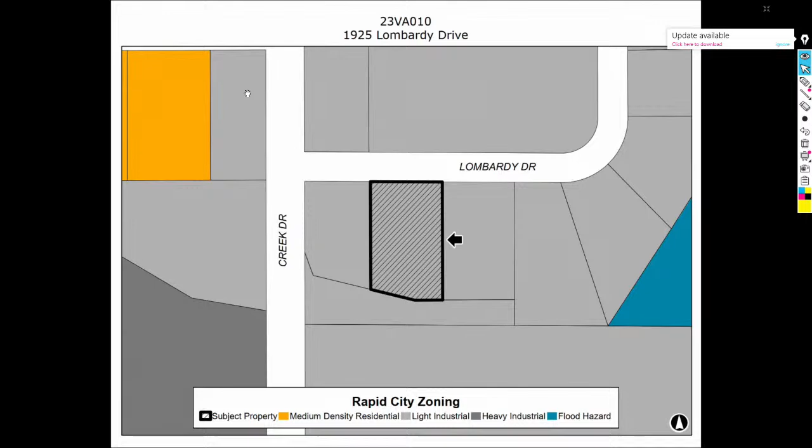Good morning. Item number 2 is 23VA010, which is a variance to reduce the side yard setback to 10 feet in lieu of 25 feet. Property generally described as being located at 1925 Lombardy Drive.

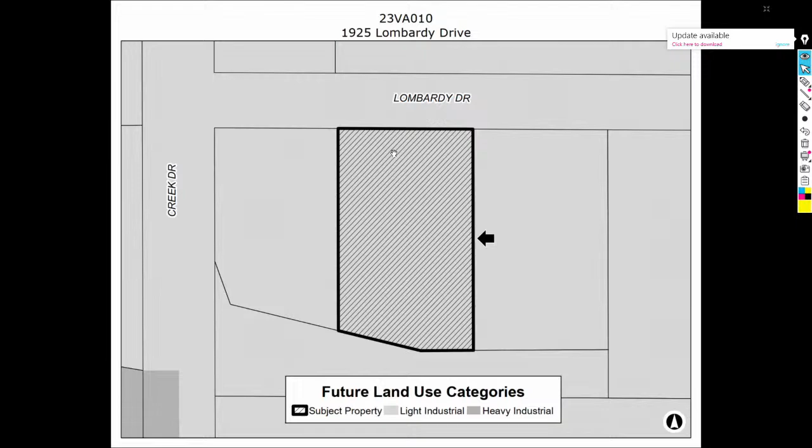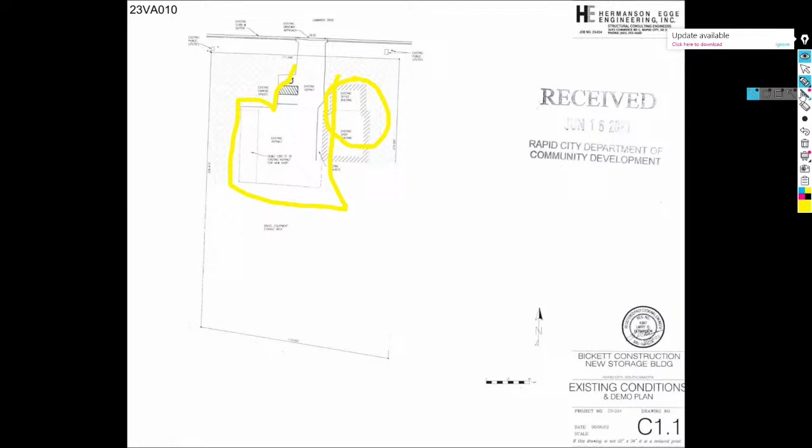And this is the proposed construction. Again, we have the existing structure located here, and the new building located here to take advantage of this concrete parking pad. They will demo some of the concrete and put this building on that. And with that, for the new building, they're asking to reduce this side yard setback to 10 feet in lieu of 25 feet.

The applicants are here in the audience. I believe they have filled out a speaker request form or two, and they're available to speak, as am I, if you have any questions.

The building would be approximately up to that line, maybe within 5 feet of it. And then by the time you put an apron on the front of the new building to keep water draining away from it, now we're modifying everything in front of the existing building to try to mitigate water and get it around the building. So that was one of the concepts of asking for this variance, just to aid and keep the drainage away from the buildings.

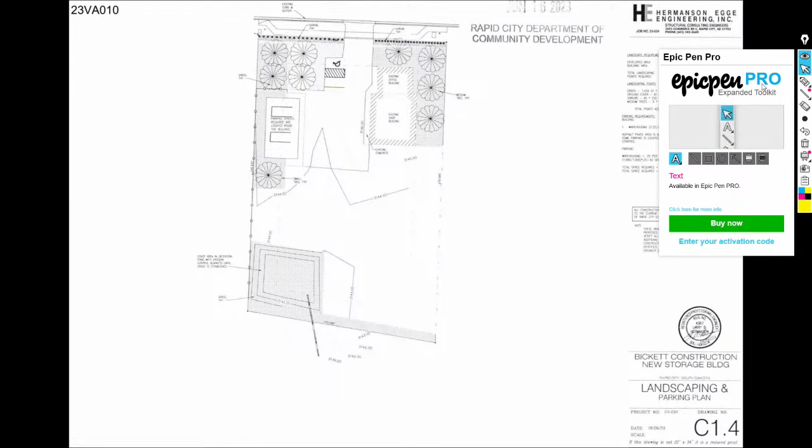Thank you, Mr. Chair. Maybe I missed it, is there a dimension on here for the setback of that existing building? Does it fall within that 25-foot span between the property line and the old structure? The current building meets all setback requirements. Okay, to me, one option would be to just locate it south of that existing building along that contour line. You keep your swale and your drainage, and you have your turning radius. It's an option, a suggestion. Thank you.

One question I had for staff, a concern we've seen in the past - not saying the current applicants have this concern - but on locating a building, is there a perceived need to have pavement running to it to access that building? Is there a requirement by the city that they would have to have pavement up to that building?

So if they're using it for storage and the storage requires that they bring items in with a vehicle, then yes, it would have to be paved. If it's just other storage where they're putting materials back there, not necessarily, but in all likelihood they're going to be driving to that door. But again, the cost of those improvements cannot be grounds for granting a variance. We're falling on reasonable use, seeing what impact this could have on the adjacent property, and trying to figure out a solution for them so that they get that storage unit.

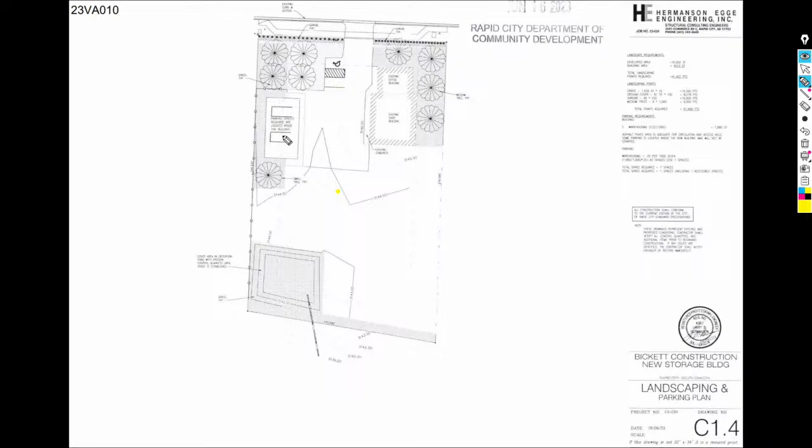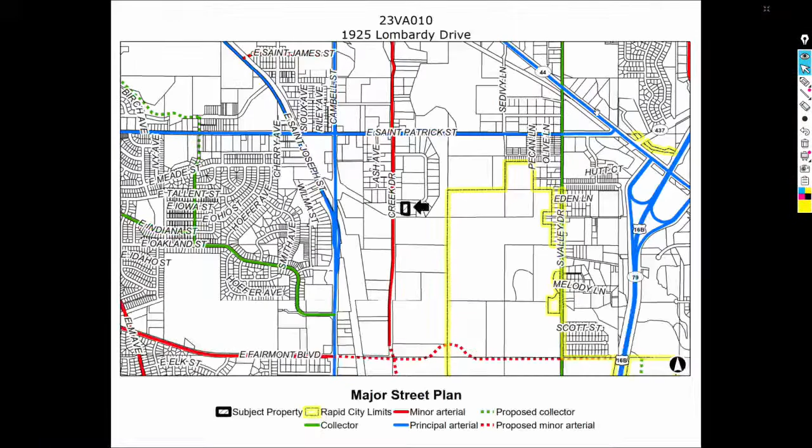Mr. Delbridge: Going back to the placement of the building, it was in the best interest of the construction company, because that gravel area to the south - the rest of the storage area - is currently being used with semi-trailers for storage, and extra materials from projects. South of the building, there's probably 2, if not 3 semis parked in there full of different construction materials.

That 30-yard dumpster he was speaking about is right there, and down to the corner there's additional construction materials that would be displaced. In lieu of setting that stuff up on the asphalt parking structure where we have the building placed, that's coming back around to asking to put the building up front and keep the back for storage, so we're not disrupting the whole area. Bringing it up to drainage standards is why the detention pond is now located in the southwest corner to pick up that extra runoff. I just wanted to explain the disruptions it would cause placing the building anywhere but where we have it.

Jim: South of the building we have the semis, tools and equipment, and storage in the back. We built a house for the Warners up in Carriage Hills years ago - it's a unique house, and there's different materials from that we're not going to find anyplace else. The shingles for that roof were made specifically for that house, the color. We need to store it so that as they get damaged, we can replace it.

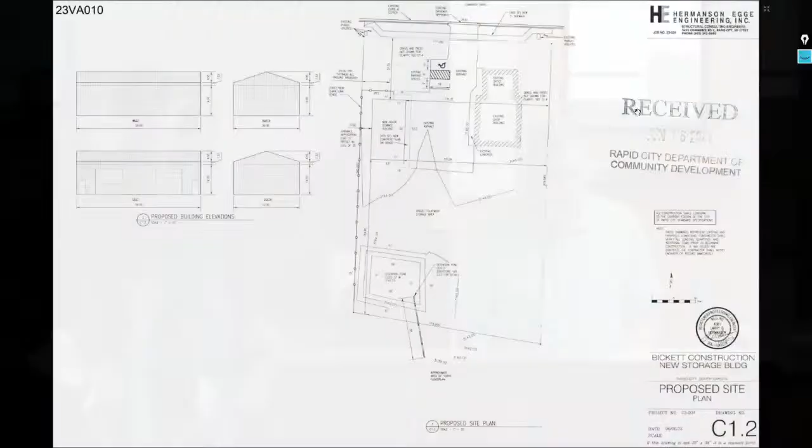Thank you. Haven: I just wanted to know what's the business on the west side, and since we haven't been provided with any public comments, I assume there was no response from that property owner? Mr. Chair, we received no response, and I'm not sure what that building is. Looks like TruGreen ChemLawn. We have a good relationship with them - their building is set up specifically for TruGreen, so I doubt they'll be moving anytime in the near future.

Karen? Thank you, Mr. Chair. I guess my question before we decide what we're going to do is, if you're talking about a reasonable amount of time or length that we can adjust, what would that be?

The lot line I'm talking about. Now I'm asking you, Vicky, sorry. Vicky, do you mean a setback? Yeah, what's the reasonable setback that would be fair to both sides, both parties?

So from staff's perspective, it's 25 feet. I figured that. And again, TruGreen owns that property today, but no one owns property forever, and we don't know what that next use might be or what that expansion might be.

But if there is consideration that you wanted to preserve that setback to the greatest degree possible, but not interfere with the swale, maybe Shane could assist us with how much distance they need to maintain to that swale in order to preserve the integrity of that drainage element. Okay, if Shane could come up and give us an idea, that would be a start.

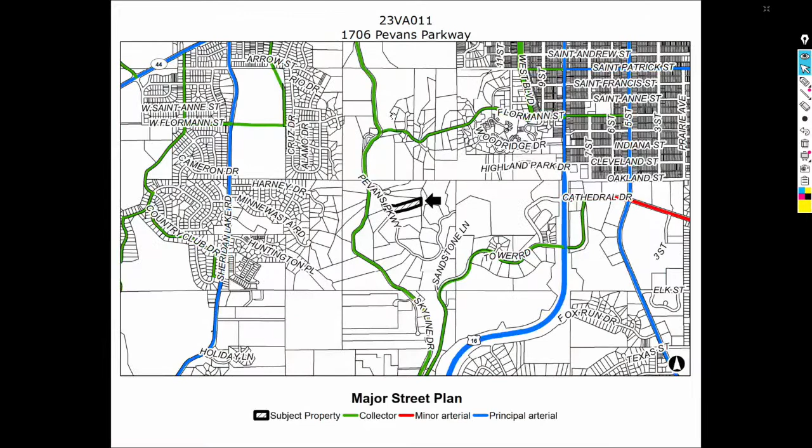Item number 3, 23 VA 011, is a variance to reduce the front yard setback to 10 feet in lieu of 20 feet for an accessory structure. Here's the site. This is 1706 Pevans Parkway. It's going to be 3.17 acres of Park Forest zoning, as you can see here. Future land use is forest conservation. The major street plan has Pevans Parkway as a local street.

As stipulated in the ordinance, accessory structures are required to be set back 20 feet from the front yard property line in the Park Forest zoning district. Therefore, a variance is required. As highlighted in the staff report, staff finds that the variance request meets none of the criteria for approval.

A garage 10 feet from the front yard property line is a use otherwise not found throughout the Park Forest district. There is 984 square feet of existing garage on site. Therefore, reasonable use already exists. Minimal adjustment, such as expanding a single car stall or carport over the existing concrete pad to the north, exists without granting of a variance.

There are no special circumstances or conditions on site that aren't common within the Skyline Pines subdivision or the Park Forest District. Granting of the variance sets precedent for future structures in the front yard setback. This variance is not in harmony with the characteristics of the neighborhood and is harmful. Engineering has also stated a structure 10 feet from the property line may be detrimental to future road improvements along Pevans Parkway. With that being said, staff recommends denial.

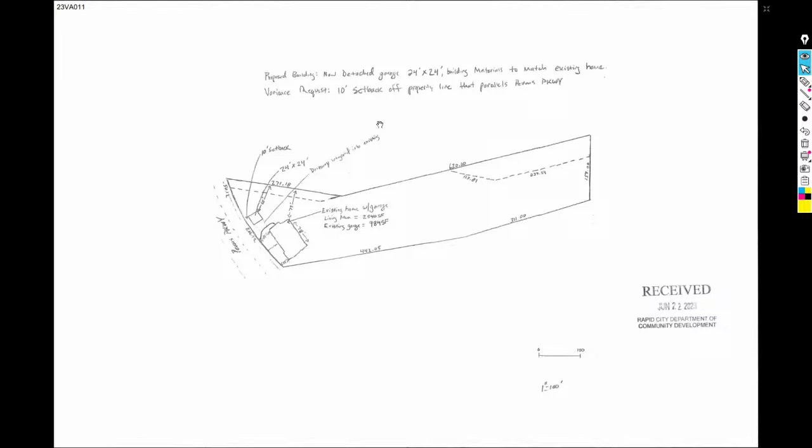The applicants are in the audience, and so am I, if you guys have any questions. Thanks.

Thank you, Mr. Chair. Vicky: just to put you on notice that when you get to the Planning Commission agenda, there is also an item from this applicant to allow an oversized garage, since the square footage of the existing garage and this garage triggers that requirement. We'll review that when we get to that item, but wanted to put you on notice of that.

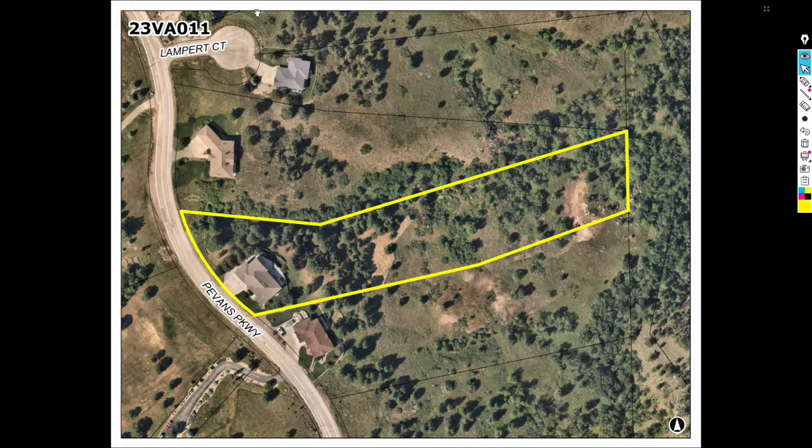Mr. Massey? As far as the opening goes, I don't know what the opening is. I know that it's significantly lower than the house. There's almost no way you could drive a car down there if you built a dwelling down there. To answer the second question, we would tie into the existing driveway.

Haven, I'll chime in. I think what you're seeing is the line created by that retaining wall, as well as the grassy area behind that's not tree covered in the picture you're talking about. Any other questions, comments, thoughts on this?

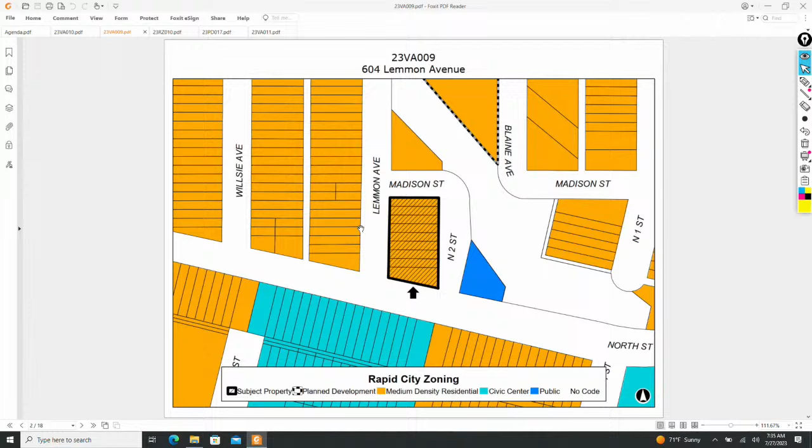The property is zoned medium-density residential district, and the future land use is urban neighborhood. The major street plan identifies North Street as a collector street with Lemmon Avenue, Madison Street, and North 2nd Street as local streets. This shows the proposed site plan of the property, and so the variances in question are to reduce the side yard setback abutting a street from 20 feet to 10 feet on Lot A, which is located right here.

So in reviewing this, staff had some of the following findings: that there is reasonable use on the property, however single-family and multifamily homes are allowed in medium-density residential, and they are permitted uses, so it does not go against the land use in the particular district.

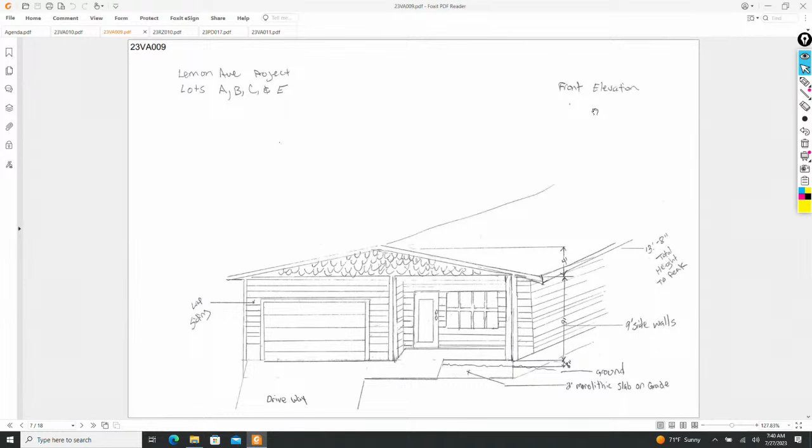Here's some drawings of the proposed structures that will be placed on the proposed lots. As you can see, they're relatively modest houses with a garage, and therefore should be providing some affordable type housing. And some other elevations of the houses.

Like I said, it's a gravel roadway right now, used more as just a driveway for the existing single-family home. Another single-family home would take access off of this, as well as the property to the east.

Staff does recommend that the side yard setback be approved based on the following criteria: that single-family homes are a permitted use in the medium-density residential district, and the request does not grant a land use otherwise excluded in the district. That the lot designations and setback requirements constitute a special circumstance that does not apply generally in the district. That there is sufficient separation from the proposed buildings to the adjacent existing single-family dwelling, and that is in harmony with the general purpose intent of the regulation. And that excess right-of-way exists for East Madison Street and North 2nd Street, and thereby reducing the setbacks to these streets does not appear to be injurious to the neighborhood.

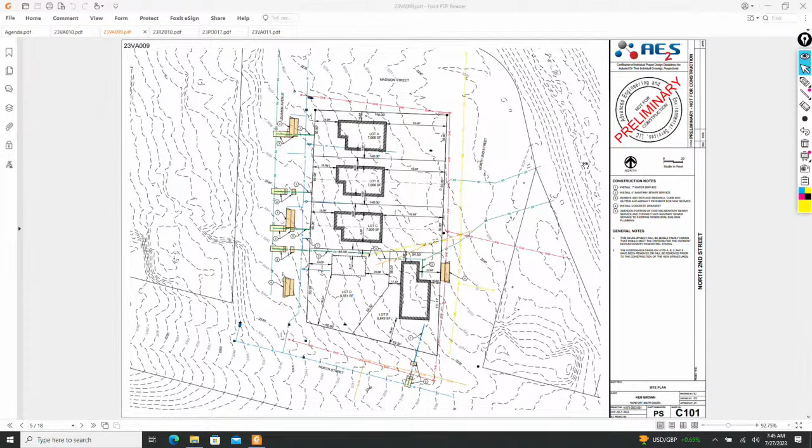This area is a really old area of North Rapid, and some of the houses that were there were very old. I've seen that current house before, and they've done a lot of changes to make it look really nice. I think to have this type of housing right there will be perfect, and I just think it's a great idea that they've worked with staff to make sure it works to the best of their ability, for the city and for them both.

So, thank you. Mr. Chair? Yep. I might add, when I was out taking site photos, one of the adjacent property owners came out to talk to me, and he was in full support of this and wanted to see some better redevelopment on this lot as well.

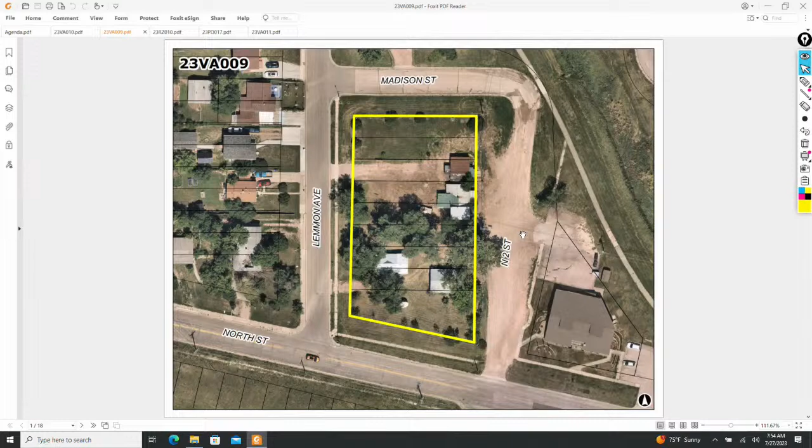need to improve that street. But currently they're going from 9 lots to 5 lots, so with that decrease of density, they can utilize the lot line adjustment plat, which says they do not have to make those improvements. Remember, today they could come in for multiple building permits, one for each lot, and it wouldn't require the improvement. So at this point, we don't have a requirement for them to improve it. Where it's only serving as a shared driveway to 2 lots, I don't see the city making that improvement in the near future, and we have this situation in multiple locations around the city.

All right, other questions or comments before we take a vote? The motion from Mike is to approve the variances as listed. All those in favor of approval of the variances, please say aye. Aye. Opposed? Motion carries. That's our last item on the zoning board of adjustment.

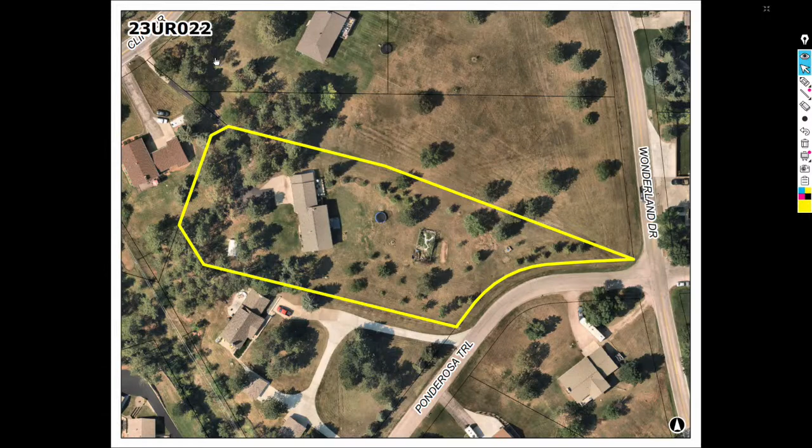Item number 7. 23 UR 022 is a conditional use permit to allow an oversized garage. The applicant has submitted a conditional use permit to allow an oversized garage at 4782 Cliff Drive. The property consists of 1.5 acres zoned low-density residential. The future land use shows low-density neighborhood. Major street plan shows Cliff Drive as a collector.

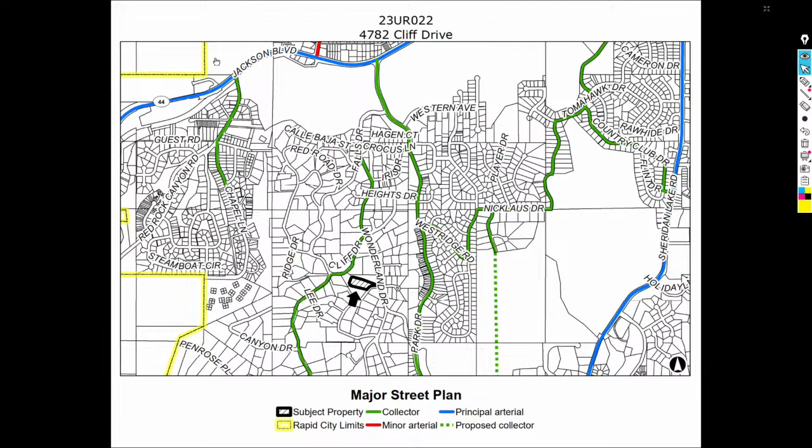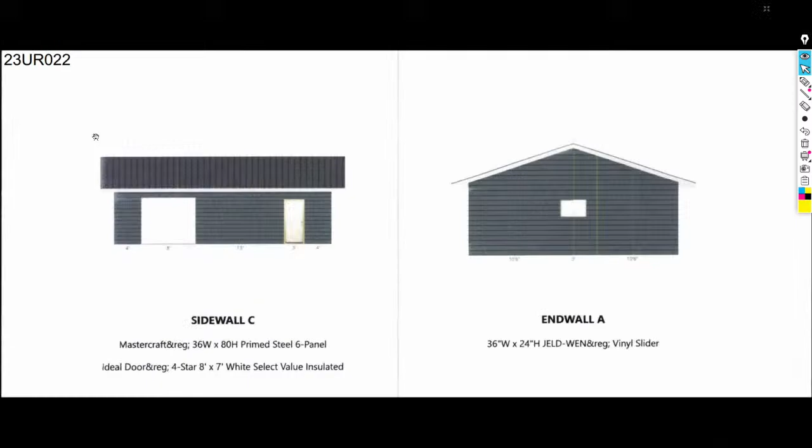Previously, Planning Commission approves oversized garages when they're recessed from the principal structure, the material matches the existing single family home, and screening and buffering is provided. The applicant has provided all three. Staff recommends approval. The applicant and I are in the audience for any questions.

I've got one question, and I don't have any issues with this application. I'm splitting hairs here, but on that survey, the lines showing the back corner of the garage were diagonal versus what we would really consider setbacks. On that south lot line, do we have the traditional setback there? Give me one sec. Yeah, I got you. It's 16 feet from the south.

And that works for, I think an accessory structure can be less on a side or rear yard setback. In this case, a side or rear yard setback for an accessory structure that sets back more than 90 feet can be 5 feet. If it's a platted lot with an 8-foot minor drainage and utility easement, then it has to maintain an 8-foot setback. They meet it either way. Sorry to split hairs. Yeah, that doesn't look like a real squared structure though, does it?

Any other questions, comments on item number 7? Karen: I think because of the topography that's out there and where it's located, that oversized garage would not hamper anybody from seeing it or driving by and saying that's really big. So I'm going to make a motion to approve this item with stipulations.

I'll second it. Karen made the motion to approve item 7 with stipulations. Vince seconded that motion. Any discussion on the motion? All those in favor, please say aye. Aye. Opposed? Motion carries. Item number 8.

Thank you, Mr. Chair. Item number 8 is 23PD019. This is a final plan development for the Hope Center to be located at 630 East Boulevard North. We are recommending that this item be continued to your August 10th Planning Commission meeting. We'll be bringing forward a recommendation at that time.

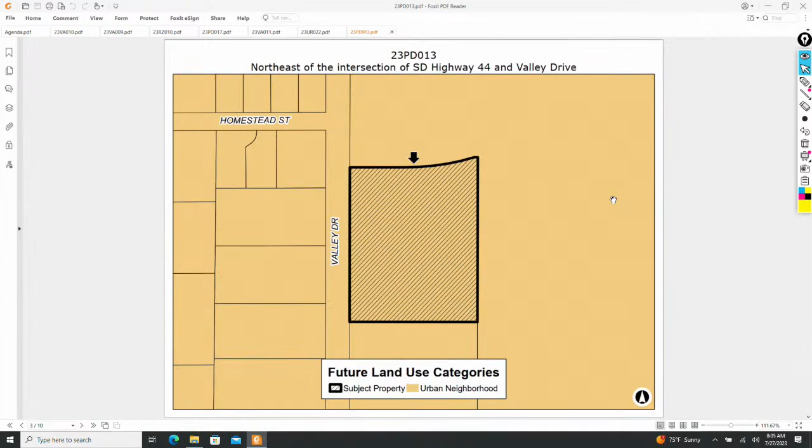The property is zoned medium-density residential district. The future land use is urban neighborhood. The property is accessed by Valley Drive, which is classified as a collector street on the city's major street plan.

A traffic impact study is required for any multifamily residential development with more than 150 dwelling units, and there'll be 180 dwelling units with both phases. The Public Works Department has administratively waived the requirement for a traffic impact study.

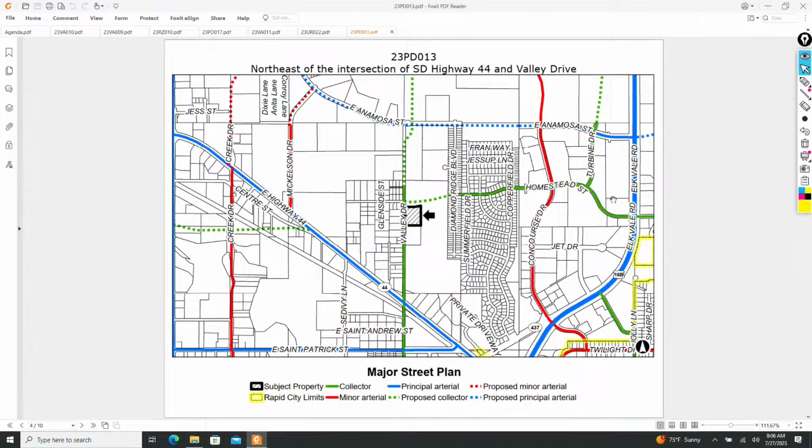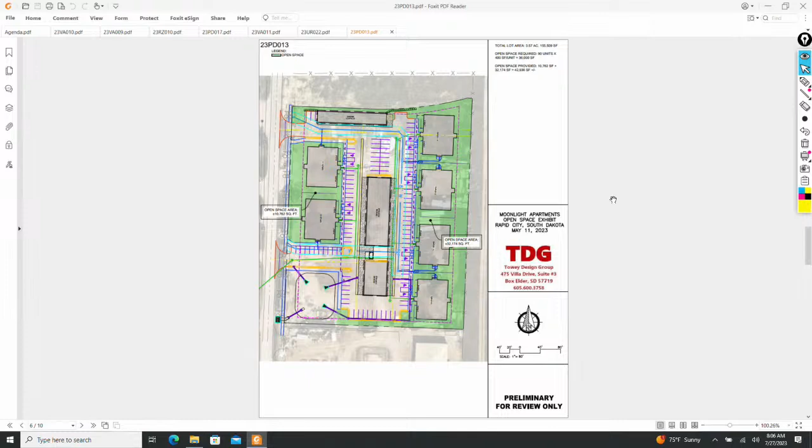This is the open space plan. Open space is provided by the grassed area surrounding the buildings and exceeds the minimum requirements.

Mike Quasney: Thank you, Mr. Chair. I know that we can't require a playground, but a lot of the developers have done this, and I don't see anything here. Is there anything included in this one?

No, unfortunately, there's no other amenities other than that grassed area for the open space. There isn't any playgrounds that are being proposed. Where is the nearest, do we have any kind of parks close to this?

I guess the big thing I'm really trying to get at is that a lot of developers started to include playground areas in their projects, an area for the kids to play and do things that kids do. I just hope that the developers always keep that in mind, and if we can help them as a planning commission, support them in doing this, that's truly what I bring it up as.